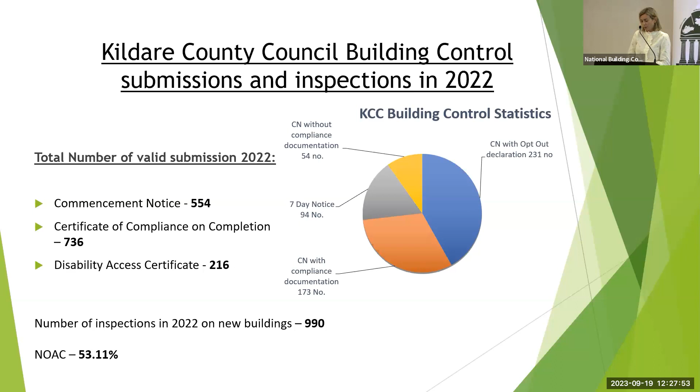In Kildare, we, as all building control officers, inspect and assess commencement notices in accordance with Article 10 for validation, just like all other authorities. A standard checklist would include commencement date, statutory document, project particulars, correct local authority description of works, online assessment, correct fee, schedule of documents prepared and yet to be prepared, preliminary inspection plan if applicable, site location map, construction drawings, and Part L compliance report.

From 2022 to date, we have completed 498 desktop technical assessments and issued 45 Section 11 requests. The following is on those desktop technical assessments.

In Kildare, we find that the most common additional information requests at validation stage are that commencement statutory forms are not correct - date, signature, description would be inadequate - and as well inadequate design details or calculations to show compliance with the building regulations like Part A structure, Part B, Part C site preparation and resistance to moisture, Part F ventilation, and also Part L and acceptable construction details.

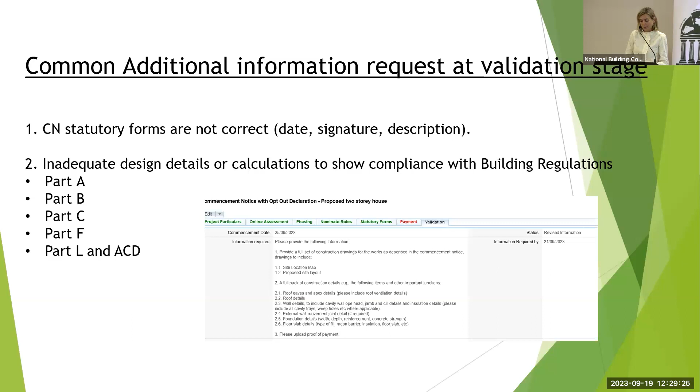In Kildare, when we find inadequate design, we issue an email to the designer, owner, and builder after validation requesting revised information. Just a few slides dealing with the common issues we find.

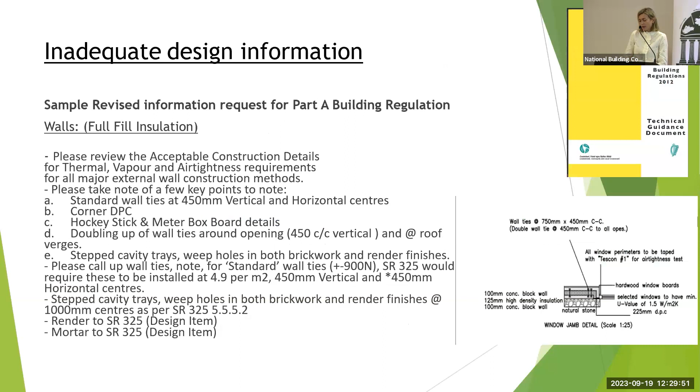Part A - main compliance issues with the drawing and specification would be SR 325, wall ties, DPCs. Part B would be main issues with the drawings being fire ratings, fire stoppings, fire doors, and we refer them to the supplementary guidance to Part B.

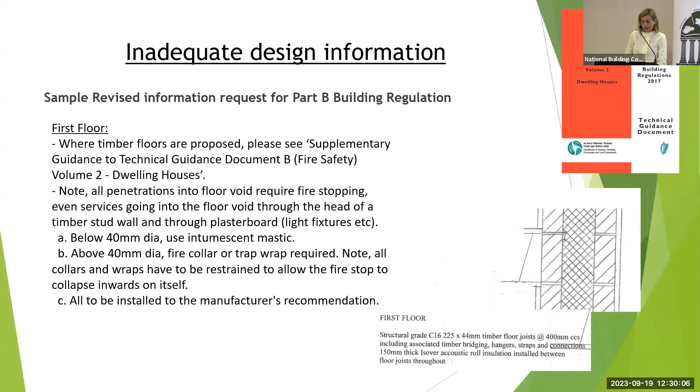Part C - the main issues would be radon barrier not specified, the sump, the underfloor fill to SR 21, and block work to I.S. EN 771-3.

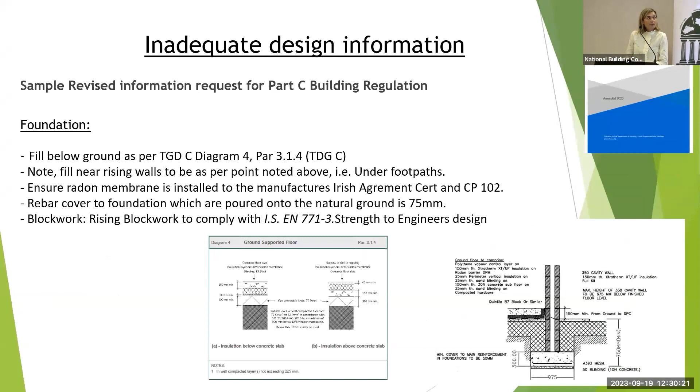Part F ventilation - main compliance issues with the drawing, specification and calculations. There is no ventilation calculation or indication of what type of ventilation strategy is proposed, and Part L.

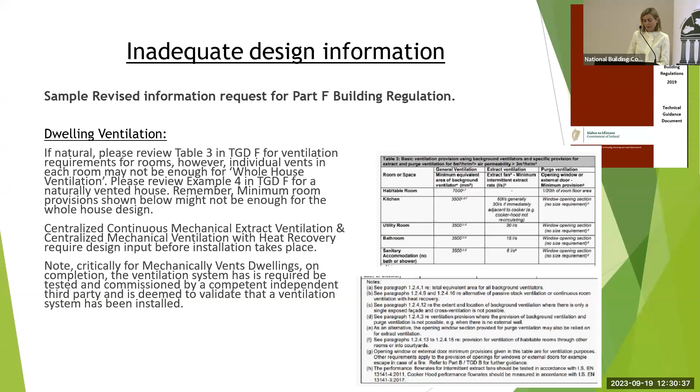Main compliance issues would be draft Part L compliance reports not provided, or U-values of the main elements, and as well acceptable construction details for the main junctions.

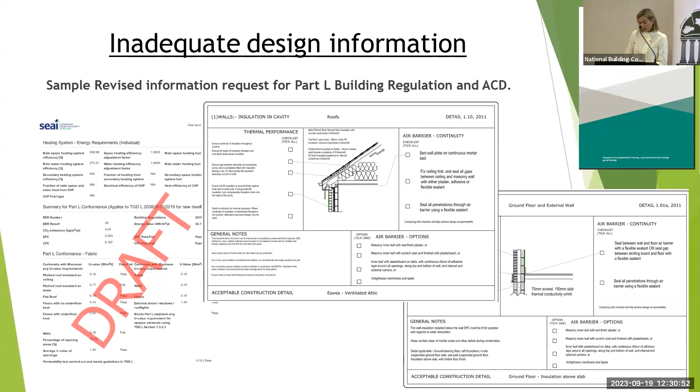How do Kildare County Council select a building or works to inspect? We have our own risk procedure document. The document has risk factors to consider based on the building type, and using standardized questions in the document, a point rating is assigned to each answer. The more points we achieve, the greater the risk factor.

Some of our higher risk factors would be schools, 3 or more story buildings. We also take into consideration random inspections, known issues with builders or designers, or new builders and designers. We take as well special care of the opt-outs.

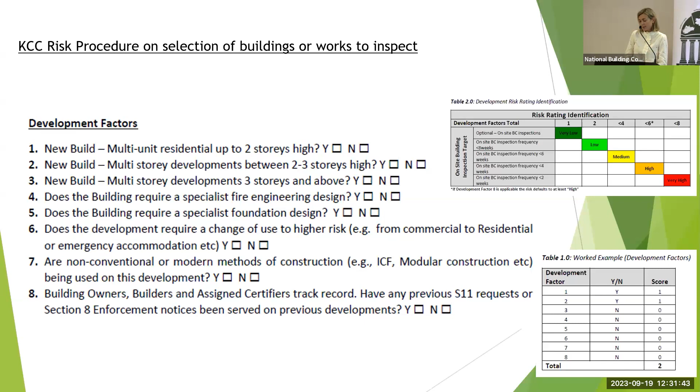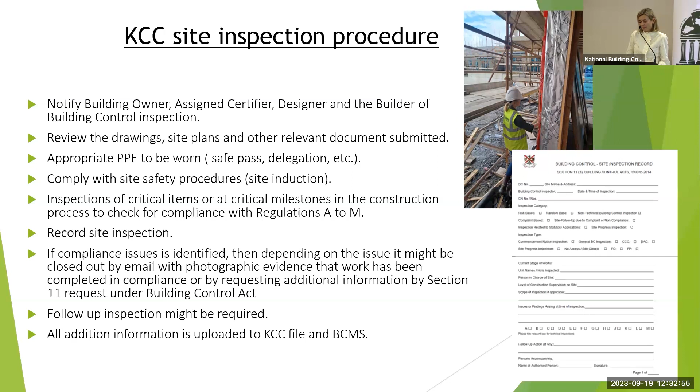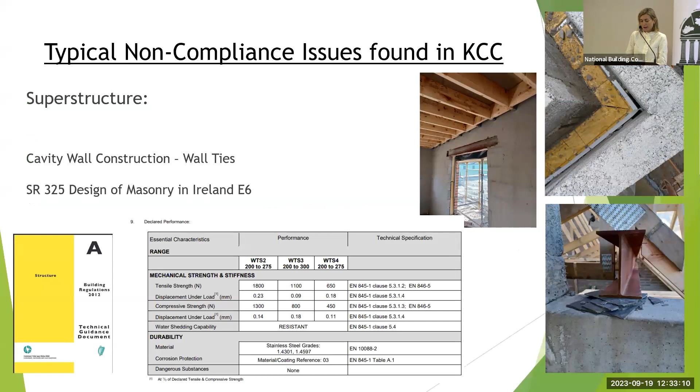A few issues on site in relation to Part A would be clean cavities, wall ties, bonding blocks, concrete heads of steel beams not properly supported. In relation to Part B, we'd see fire stopping penetration, cavity barriers, fire doors, windows for escape and rescue.

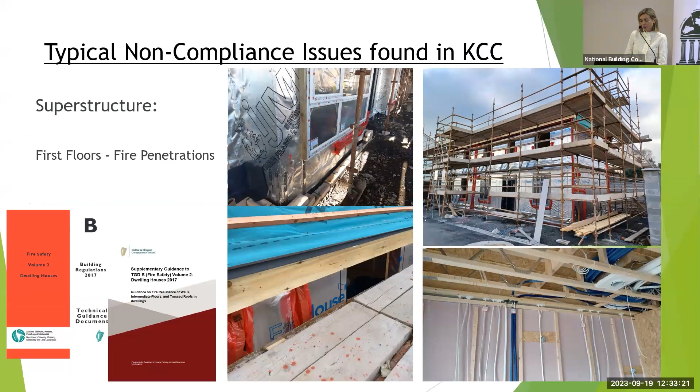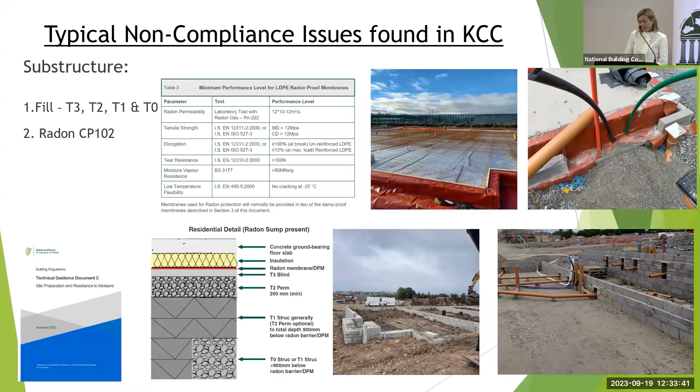Part C, the typical compliance issues we would see are proper suitable materials used for underfloor as per ISEN 13242 or SR 21, the radon sump and outlets, the radon barrier Agrément cert, and a few miscellaneous items in relation to Part K and Part M.

Very popular: low-level windows with a drop grade greater than 1.4 meters directly from the outside, guarding issues, stairs, corridors with sanitary fitting layouts incorrect in the toilets and WCs, ramps and handrails.

Depending on the compliance issues, we would either close it off by email with photographic evidence that the work has been completed in compliance, or by requesting additional information by Section 11 request under the Building Control Act.

Things I think could be improved would definitely be building control authorities providing more workshops for designers to encourage better compliance with drawings, calculations, specifications and inspections, and additional good guidance to homeowners regarding opt-outs.

Currently, Kildare is issuing, as part of improving compliance with the building regulations, a standard email to all valid commencement notices and opt-out commencement notices, which includes a list of typical compliance items, as well as good practice guidance, useful links, a sample list of ancillary certs required for the building works, as well as improved communication between building control authority staff and assigned certifiers, designers, builders, and owners.